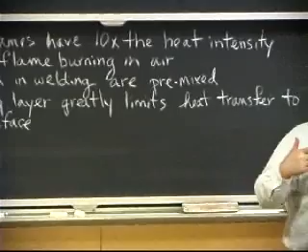We talked last time about flames, and we mentioned that pure oxygen flames have 10 times the heat intensity of the same flame burning in air. That's because the combustion intensity is the product of the enthalpy of the reaction, basically the temperature of the flame, and the velocity of the flame, the rate at which it brings heat to the surface. That basically makes the heat and combustion intensity proportional to the temperature of the flame squared.

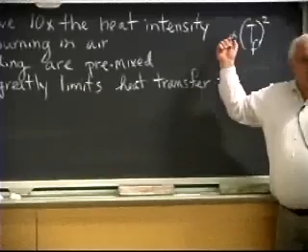Or thereabouts. So basically, a flame burning in air may have a temperature of 1,000 degrees C, or 1,800 degrees F, or even 2,200 degrees F. It's all approximate in all this stuff. But nonetheless, by all that extra nitrogen, you reduce the heat intensity significantly.

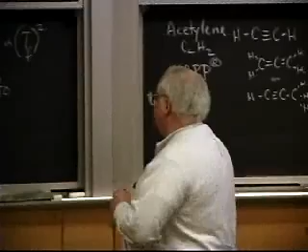Most of the flames we use in welding are pre-mixed. If we look at the torches, whether it's the little propane torches I passed around the other day, where you basically just have some holes in a venturi, and the tube itself is the mixing chamber, or whether it's an oxy-acetylene torch where you turn on a fuel valve and an oxygen valve, and then you have a mixing chamber, and then you go through the tube - doesn't really matter. They pre-mix and get something close to the right stoichiometry.

And in fact, in an oxy-acetylene torch, you shouldn't play too much with the acetylene pressure. The acetylene pressure should be roughly constant at about, if I remember correctly, about 5 psi.

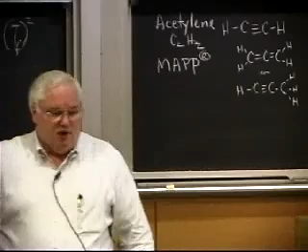And you should - anybody know how much you open a fuel gas valve? If I'm turning on the gas in a tank, or even on the torch, do you screw the valve all the way open, or do you just open it a half a turn, or 10 turns, or 5 turns? A quarter turn to a half a turn. And the reason is you want to be able to shut it off quickly. You don't want to have to sit there and crank the thing 10 turns while something else is burning up. So that's the general rule on fuel gas cylinders or torches: the fuel gas only gets opened a quarter to a half turn, and that usually will allow enough to flow through.

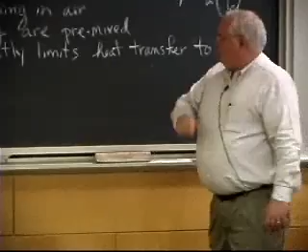An argon tank or an oxygen tank - actually oxygen tanks are probably the same kind of partial turn. Argon tanks, on the other hand, you're supposed to open them all the way, which might be 6 or 7 turns. The reason is they have a seal to close. They also have a seal at the top of the valve so that you don't leak oxygen impurity or air impurity into the top of the valve when the valve is open. So basically they have a seal at the top, and you're supposed to open it all the way to seal the top so that something doesn't leak into the valve while the gas is going out, because you're trying to get good pure argon as opposed to something contaminated with air.

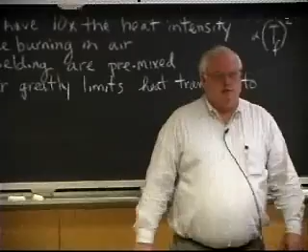The other thing - anybody else? What about the threads on fuel gas? Anybody know what they do for safety on the left-hand threads? In that way, it's impossible to hook the oxygen and the fuel up to the same system, because you can't screw things together. You can't screw right-hand threads and left-hand thread systems together, because what would happen if you did? You'd end up with a little bomb somewhere, right? And people have done that in the past, which is why the standard is the left-hand thread.

And you know how you can tell - well, in most cases, the left-hand thread you can tell, because on the hexagonal nut, they basically machine a little groove in there to remind you that it's a left-hand thread. I guess I should have brought one, but if you look at an oxy-acetylene torch setup, it'll be a left-hand thread, but the nuts will also have a little groove machined through the middle of the hex, so that it can hopefully remind you why it's not screwing on properly when you turn it with the right-hand thread.

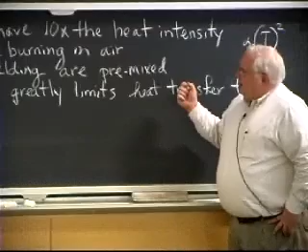The last thing we said was that the gas boundary layer greatly limits the heat transfer to the surface. I can be bringing in the equivalent of 100,000 watts per square centimeter to the surface, but the actual amount that gets into the material is only 2 to 10% of that, depending on the velocity and temperature of the gas. The reason is I get this stagnant gas boundary layer, and I have to conduct the heat through that stagnant layer. It's basically an insulating layer on the surface of the solid or liquid I'm trying to heat.

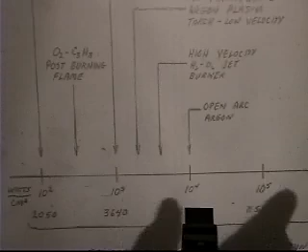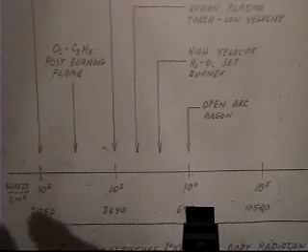We talked about flames in general only having heat intensities down in the 10 to the third watts per square centimeter range. Here's that plot again. The oxy-acetylene flames are down here, but we're going to talk later about how we get to arcs, which are essentially a type of flame that gets an extra order of magnitude for an open argon arc, essentially a trick to get around the boundary layer problem. Today we're also going to talk about flame cutting, where I actually get around the boundary layer problem and can get heat intensity equivalent to about 100,000 watts per square centimeter. So there are ways around these limitations on flames, and we'll talk about those shortly.

There's also a debate among people who sell gases about whether you should use acetylene or MAPP for welding of steel, or which one you should use for cutting. Remember, acetylene is just two triple-bonded carbons with two hydrogens. It's as simple a hydrocarbon as you can get, the smallest number of atoms possible in a hydrocarbon. Even methane has 5 atoms, CH4.

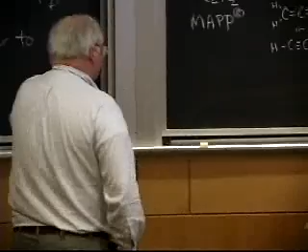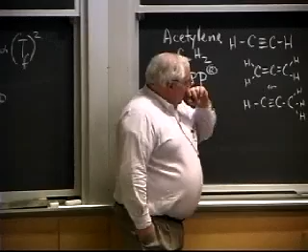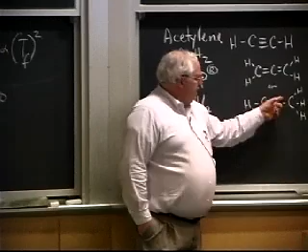The adiabatic flame temperature, if you burn acetylene in pure oxygen with exactly the right stoichiometry and no heat loss to the surroundings, is 3,100 degrees C. MAPP, on the other hand, a registered trademark, stands for methyl acetylene propadiene. Propadiene is 3 carbons with double bonds between them, filled in with 4 hydrogens, so it's C3H4 - that's all review. Methyl acetylene has a methyl group, CH3, attached to a triple-bonded carbon - that's your acetylene with a methyl group on the end.

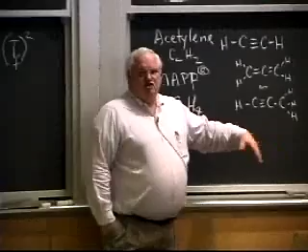It turns out MAPP gas, because it has more hydrogens, and hydrogen doesn't burn as hot as carbon, has a slightly lower adiabatic flame temperature of about 2,870 degrees centigrade, roughly 230 degrees lower. Now, if you listen to a MAPP gas salesman, he'll tell you MAPP is safe - it can be pressurized, you don't have to fill the tanks with acetone to dissolve it, and it's lighter and easier to transport. It's safer, and it works just as well.

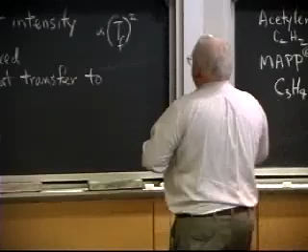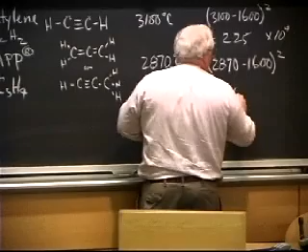And the question is, does it work just as well? It turns out the heat intensity of the flame goes as the temperature squared, and if I'm trying to melt steel, the temperature difference I care about is relative to the melting point of the weld pool, about 1,600 degrees centigrade. 3,100 minus 1,600, squared, gives 225 times 10 to the 4th. 2,870 minus 1,600, squared, gives 161 times 10 to the 4th. So even though there's only about an 8% difference in the adiabatic flame temperatures in degrees centigrade - maybe 7% in Kelvin -

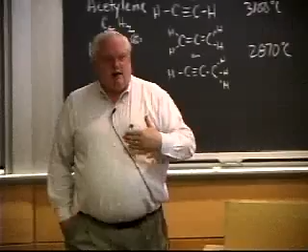it turns out there's a 40% improvement, or 28% decrease if you will, in the heating value of acetylene versus MAPP when trying to melt steel. If you're just heating up cold steel, there's hardly any difference at all, since it's 3,100 minus about 20 degrees C versus 2,870 minus 20 degrees C, and squaring those doesn't show much difference. But when you're heating something already hot, like a liquid weld pool, your ability to transfer more heat is limited by the upper temperature of the gas, so that small temperature difference has a big effect on welding ability. With oxyacetylene, you can probably weld about 30% faster in terms of travel speed along the weld pool compared to MAPP gas. So why does anybody use MAPP? Aside from being able to buy these nice handy cylinders, you can burn down your house more easily with acetylene.

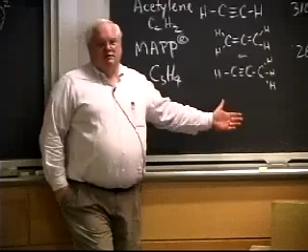Cheaper? No, it's actually not cheaper. It's competitively priced. The main reason is it's safer. It really is safer.

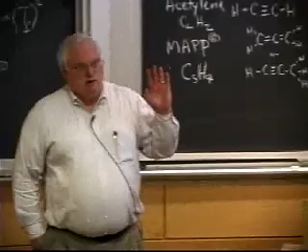For other applications, like flame cutting, it turns out you don't need that extra difference in temperature, it's not going to have a big effect. So let's talk a little bit about flame cutting, which is the next topic: oxy-acetylene cutting.

In an oxy-acetylene cutting process, how many people had actually seen it before the demo? Okay, so a lot of you have seen it. What's the biggest thing anyone's ever seen? Anybody seen 10-inch thick flame cut pieces? 3-inch? 4-inch? 1-inch? Okay, 1 or 2 inch. Well, the biggest I've ever seen is about 10 feet thick.

Steel? Yeah, we're going to talk about it. It turns out steel is not the only thing that can be flame cut, but it's one of the only things that can be flame cut. Flame cutting is sometimes called burning of the steel, and it literally is oxidation of the iron. The heat is coming from pure oxygen hitting the hot iron surface.

We'll talk about how you get around the boundary layer problem. You get tremendous heat intensities, and as long as you can blow a jet of oxygen into the hole, you can cut things that are very thick.

Some of you have seen, if you're here for the second half, a continuous cast in a steel mill, where you have a hot band of steel coming out of the casting furnace, and they basically just take a pure oxygen lance. They don't even have a flame around it, they just hit it with pure oxygen and cut through it. So you can certainly cut through 10 inches, they do that regularly on a continuous casting line for steel plate.

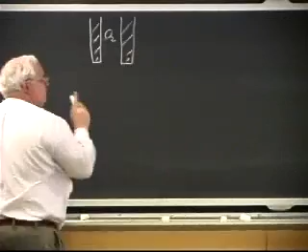So what you typically do, the torch for oxyacetylene, schematically, is very simple. I'm going to have a central jet that will contain pure oxygen, and I'm going to have some outside jets which will be an oxygen-fuel mixture, pre-mixed.

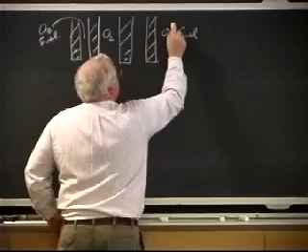So initially, this is my steel plate, and I will start some little flames, pre-mixed flames, shooting out here. I don't want to turn my oxygen on yet.

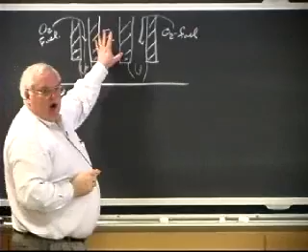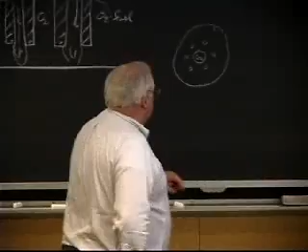If I look down, end-on, at the tip, here's my central oxygen hole, and I'll have a series—it can be 4, it can be 6—depending on the size of these things. Obviously if I'm cutting something 6 inches thick, I have a bigger torch and a much bigger oxygen center jet, so I'll have more circles of these little pilot flames around here.

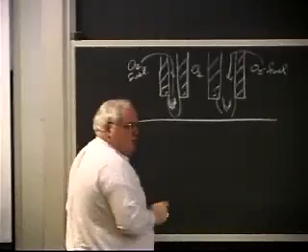The pilot flames, if it's oxyacetylene or oxy-MAPP gas, don't have to be—you can also use oxy-propane, or oxy-gasoline. People use gasoline sometimes because it's a nice, simple liquid; you don't have to pressurize things.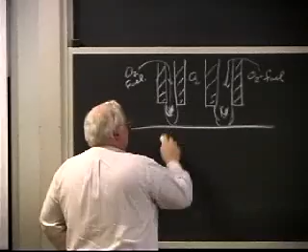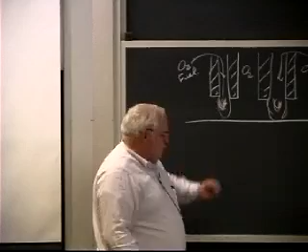Basically, the flames might be a quarter inch long, and it'll be kind of a soft blue here, with a deeper blue, or actually kind of a white, internal cone. This is the primary combustion cone, and this is the secondary.

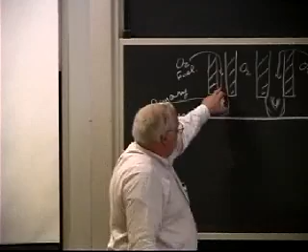In the primary combustion zone, you're burning your fuel, C2H2 or C3H4 or whatever your hydrocarbon is, and getting primarily water vapor and carbon monoxide. In the secondary combustion zone, a little bit of air comes in and the CO is burned to CO2. Carbon monoxide forms at high temperatures, CO2 forms at lower temperatures.

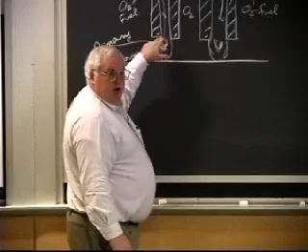So you have a hotter internal cone and a cooler outer cone. The primary combustion is of what's coming in your premixed flame, and once you use up all your oxygen, the outer cone is the secondary combustion. It's basically a diffuse flame, but very controlled diffusion, so we don't call it a diffuse flame - it's not wisping around, it has high velocity like the center. So that's what the torch looks like.

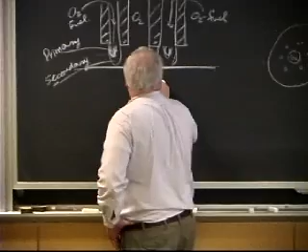This is the surface of your steel, or titanium, or whatever it is you're going to cut. Typically when doing oxy-acetylene cutting, I come down and put this inner primary flame right on the surface, just little points right on the steel. Then you watch the surface of the steel until it starts to glow a little bit red. You're holding one spot, you see it glow red, and then I look for a little specular reflection, something kind of blowing back at me a little bit.

That basically is the oxide surface of the steel - an oxidized surface, with the oxide starting to break up. It turns out for steel, the melting temperature is 1380 of the oxide.

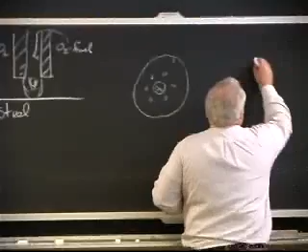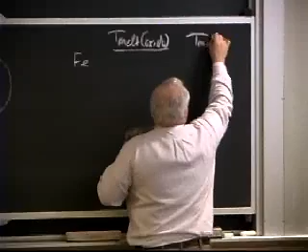So it turns out for iron, comparing the melting temperature of the oxide versus the melting temperature of the metal: for iron, it's 1380 degrees centigrade and 1536 centigrade. So the iron oxide surface layer on the steel melts at a lower temperature.

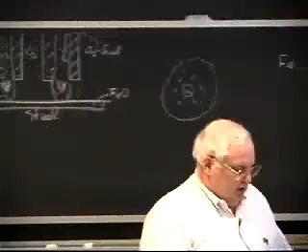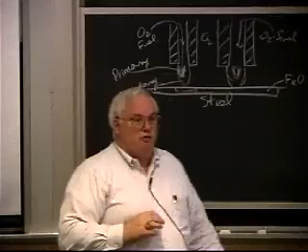It turns out the oxide is FeO - this is the black oxide on the surface, same stuff as before. But as you heat it up, the oxide will expand on the surface and eventually start to crack up a little bit, which is giving me some of that specular reflection. As soon as I see that, I open up the trigger on the torch, and oxygen blows through. Now through these little cracks in the oxide, I'm putting pure oxygen in contact with hot iron as it breaks through the iron oxide.

I'm breaking up these little islands of iron oxide, and I have pure iron underneath at 1300 degrees centigrade. In the presence of pure oxygen, I get ignition. I burn the steel - the iron becomes the fuel for that central oxygen jet. At that point, I can turn off the preheating flames and keep burning with just a straight oxygen jet.

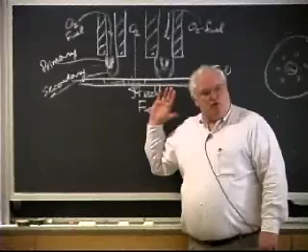Now, it turns out for hand torch cutting, you tend not to turn off those flames, because the rate at which you can move forward, if you're just straight oxygen cutting, is only proportional to the rate at which heat is transferred to the material ahead of you. So these are basically little preheating torches.

I ordinarily keep those on, but if my steel was already hot, like in a steel mill, I just cut with a straight oxygen torch - I don't have to do it, just the oxygen hitting the hot iron oxide.

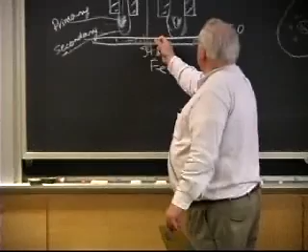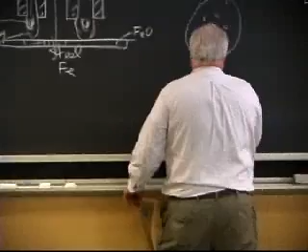And you really don't have to get to quite 1380 - it turns out this stuff breaks up. But once you do get ignition, it does get to 1380, just because of the heat of combustion of the reaction. You've got iron plus 1/2 O2 goes to FeO, plus lots of heat, and that heat melts the FeO.

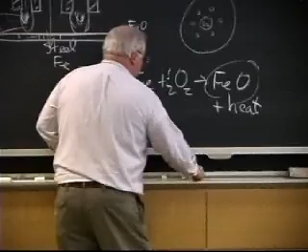The gas jet blows the liquid oxide aside, exposing more fresh iron to a fresh oxygen jet, and you just burn right through it. As you probably saw, you can punch through one inch of steel in a fraction of a second with this. It's a very rapid process - basically a flare going off, but a controlled flare.

So if I want to see what a flame-cut surface looks like - turns out these are all plasma cut.

This is a handy dandy plastic standard from the American Welding Society for surface roughness guide for oxygen cutting. There's sample 1, 2, 3, and 4. Sample 1 is like someone who either has Parkinson's disease or was drinking too much the night before. Sample number 4 is a fairly flat, relatively smooth surface.

I've seen things better than this, but basically the American Welding Society sells this so a welding inspector can go through the shop, and if they've called out a specific level of quality of the cut, it's just a comparative gauge. But for you, it's just a little plastic mold. I'm sure those plastic molds were made from real pieces of steel, so far as that goes.

Now, it turns out there are other metals that you can flame cut. Well, actually, there are not. But you can flame cut iron, and that's good.

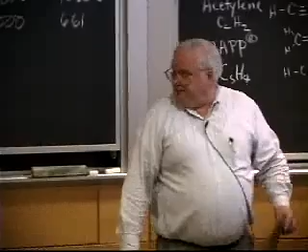Aluminum, it turns out, we have some problems. The melting temperature of aluminum oxide is 2000 centigrade, and the melting temperature of the aluminum is 661. You cannot flame cut aluminum. What will happen is you'll melt the aluminum underneath before the oxide breaks up and exposes fresh aluminum. That's not to say aluminum metal can't be ignited, but it won't be ignited in a nice controlled way with the torch. You'll have a very serious fire as far as that goes.

So that doesn't work. Magnesium is about 2800 C and 660 or 650 melting point of magnesium. So that can't be cut.

Chromium turns out is about 20... actually it says 2800. I don't think that's right. I think it's 2200 and some.

What's sublimation versus melting? Go directly from solid to vapor, no liquid in between. Dry ice sublimes - solid to vapor, no liquid unless you're under high pressure. Chromium, as you heat it up, the solid just starts to vaporize away. You don't get chromium liquid unless you go to high pressures.

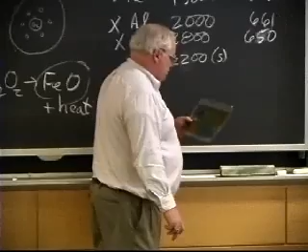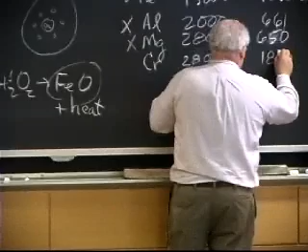Turns out, oh, I'm sorry, that was right - there's 2800 for the chromium metal, I'm sorry. Or chromium oxide. It's 1815 for the metal sublimes.

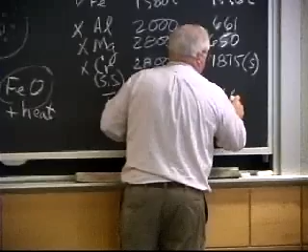And so that means stainless steel cannot be flame cut because it has a chrome oxide layer on the surface. So you've got to have something with a lower melting oxide. Except titanium - 1750 for the oxide, 1668 for the metal. Turns out titanium can be flame cut.

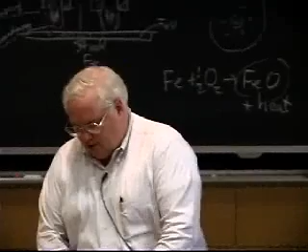The reason it can be flame cut is that above 900 degrees centigrade, titanium diffuses away the protective titanium dioxide scale. The oxide scale will essentially dissolve away, or the oxygen will dissolve into the titanium. So it is possible to flame cut titanium.

If you'd like to see a piece of flame cut titanium, this is the only one I could find in my office, but you can look through your office to see if you have one. This is actually a historic piece for me - this was my first research contract when I became an assistant professor 25 years ago. There's a polished edge, two saw cut edges, but on the back side you'll see a darker edge with the same type of surface roughness. That's a flame cut titanium edge, on 1-inch thick plate. Flame cut's just fine.

The only problem is it tends to give off lots of smoke. And in fact, one of my stories I like to tell is...

This is before my office was right across from the lab. I was up on the fourth floor, and there was a particular staff member who will remain nameless, but used to complain about the smells coming out of the weld lab sometimes, because you're actually in there welding and doing things - any kind of metal shop where you've got flames and torches. We have exhaust fans, and you turn them on, and they just go right out the window.

In any case, this was 15, 20 years ago, and the technician at the time was named Bruce. Bruce was flame cutting some titanium for some work we were going to do, and does a lot - even though the ventilation was on, the whole place kind of gets a little hazy and stuff. So the person across the hall smelled it and called the safety office. They called me, and I said, 'Oh, okay' - this was weeks before when we were doing it some other time. I said, 'Oh, okay,' and I just kind of ignored them. So they called the safety office.

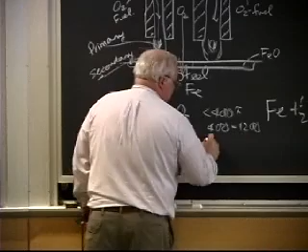Turns out Fe2O3 hydrates to form an iron hydrate. That's rust. Orange, brown, nice fresh rust is orange. As it ages, it hydrates slightly differently, turns brown. Fe3O4 is magnetite. It's magnetic, responds to a magnet.

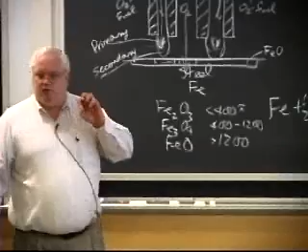It's sort of black. This could be magnetite on the surface of this piece, but I'm not positive. FeO is a slightly darker black. The black iron pipe that plumbers use to plumb boilers and things like that, that's FeO. That's what's called mill scale, because it formed at high enough temperatures that you're getting FeO. It's a very adherent layer.

And in fact, you can ask the question, why can I use black iron pipe in a boiler? If I go down in my basement and look at the hot water heater, the hot water boiler, it's just black iron pipe, steel pipe with FeO on it. If I look at my potable water system, the stuff I drink and wash with, it's copper. Well, why do I spend the money for copper if I could use black iron pipe? What's the difference between the two systems?

Not temperature, yeah, it's hotter, we make it worse in the boiler, right? You still get a lot of corrosion in the boiler system, though. Well, you can - the water in your boilers is like sludge after a while. So if you're not controlling things properly, that's true.

Which is 95% of the homeowners. Well, I've seen homes that have the same black iron pipes for 50 years. Oh, sure, the pipes will stay there, but the water in it gets rusty looking. Yeah, it tends to be rusty. It's the oxygen in the water. But if you go cut those pipes open, you're not going to see too much corrosion.

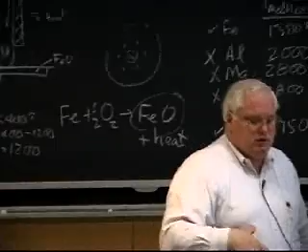Because of the loss, I had air in the system, and we were hearing gurgling up on the second floor. You could hear gurgling from the third floor in my daughter's bedroom, making noise for a couple weeks ahead of time. Finally, when I realized this guy had turned off the makeup water, I turned it back on, and the gurgling on the third floor went away because I didn't have any more air in my pipes.

But the problem is, if there's oxygen in the system, you get corrosion. It's not the water that forms the iron oxide - it's not a reaction of iron plus H2O going to iron oxide plus hydrogen. It's that the water promotes a galvanic reaction that allows the oxygen in the water to react with the iron and cause pitting and other damage. Get the oxygen out of the system, and you get no corrosion.

That's why in commercial boiler water systems, which really can't afford to corrode, they put deoxidants in there - things like nitrites. A nitrite is NO2, which will oxidize to NO3, so it scavenges oxygen from the system and prevents corrosion.

You also put in hydrazine, which is N2H4. Hydrazine will scavenge the oxygen - it's not that stable, it will form water plus nitrogen. So in nuclear reactor water, you basically put hydrazine in when you cool down the reactor and shut it down for a while, to keep any oxygen from getting in the water.

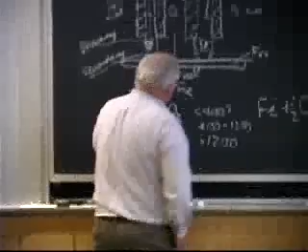What happens when I seal off that closed water boiler system - yeah, there's oxygen there, but I consume it very quickly by forming a little bit of mill scale. In fact, it's a low pressure oxygen system, and I'll form this not just at high temperatures, but at lower oxygen pressures than atmospheric - I'll form FeO rather than Fe2O3.

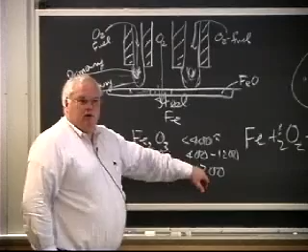Obviously this has got more oxygen - these two have more oxygens than this. This is going to be favored as the formation at lower oxygen pressures and higher temperatures. So what happens is I scavenge the oxygen by doing a little bit of corrosion in my system.

Then the oxygen's gone, and as long as I don't let it back in. Now, about 4 or 5 years ago, someone sent me a 1-inch pipe that had complete hardening of the arteries, completely clogged with rust.

This was from a wet fire water system, which is supposed to be a closed system. There are dry systems and wet systems. The advantage of the dry system is there's no corrosion in the dry pipes, but the disadvantage is if the valves don't open, you don't have any water. The wet system always has water, but the disadvantage is if you don't maintain it properly, you can get corrosion. It's supposed to be a closed water system.

Well, they brought me this thing, and it was only a 7-year-old system. I had it next to my desk for about 1.5 years before I threw it out. It was about a 1-inch length of pipe, completely filled with rust. I called them up and said, you guys got a leak in your system somewhere. He said, well, yeah, how'd you know that? I said, because you have to get oxygen in the system to cause this kind of corrosion.

He said, oh yeah, we had this big warehouse, and we had about a 3/4 inch or 3/8 inch leak that we just let go down the drain for the last few years. So they knew they had a leak in the system and they had makeup water coming back in. They asked, well, what do we do? I said, you replace the entire system, because you didn't fix the leak for 3 years, so now you get to replace the entire system.

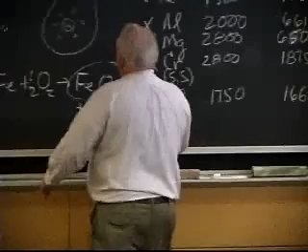See, I told you I can go with one digression. I'd much rather do digressions than this other stuff. Anyway, you'll remember the stories - just lecturing is dull.

Do I have any other stories on water systems? I do have some. Turns out if you have soft water, which we have in New England - I told you about marbleizing pipes before, didn't I? In a potable water system with copper pipes, you want a little excess calcium so the limestone precipitates out and you get these marble deposits. It turns out limestone is calcium carbonate, and marble is calcium carbonate too, just formed a slightly different way geologically. They call it marbling of the pipes.

If you have a slight excess of calcium in your water - calcium being hard water - you'll plate out this white deposit on the inside of your pipes. Sometimes it's so thin you can't even see it. If you cut out a piece of pipe from your basement in an old house around here, slit it in two, and look at it, it'll just look kind of brownish copper. That's because the marbleized layer is so thin you can't see it.

But if you put it in the scanning electron microscope and analyze that surface, you'll see all kinds of calcium and copper. The copper peak might be 5 times the size of the calcium peak, but you'll see a significant calcium peak. The reason being, you basically had limestone or marble precipitate out, if you're lucky.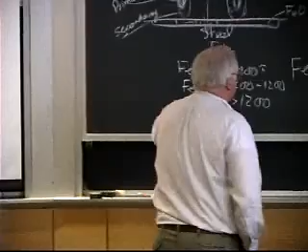Now it turns out the reason you can get such high rates of effective heat transfer here is because I have no gas boundary layer, in theory. What happens to the gas? Well, the gas in here is pure oxygen, and it goes from a solid to a gas to a liquid. So I condense my boundary layer to a liquid.

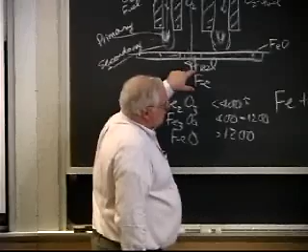The boundary layer is consumed by the reaction and forms a liquid, which is blown away by the jet of oxygen coming in. So in theory, since this is the only thing, I have no gas boundary layer, and now I can get the whole combustion heat intensity, essentially, of the flame. In this case the flame is an oxygen-iron flame, but the combustion heat intensity is the rate at which I blow that oxygen to the surface.

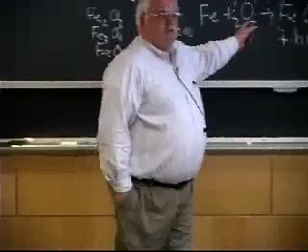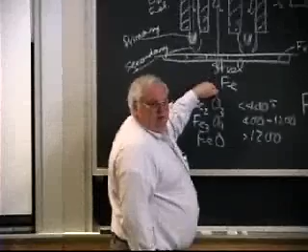If I calculate a combustion intensity, it's the enthalpy of this reaction times the velocity at which the oxygen is coming to the surface, and I don't have to degrade it by 90 to 98% because of a boundary layer. I actually have the full heat intensity on the surface. So I go from 1,000 watts per square centimeter to close to 100,000 watts per square centimeter as an effective heat intensity. If I look at my heat affected zone sizes and travel speeds, the effective heat intensity is several times 10 to the fourth, approaching 10 to the fifth watts per square centimeter as an effective surface heat intensity. But it's not really a surface heat intensity because I'm really blowing my fuel down beneath the surface. Nonetheless, it's a very, very high heat flux.

The problem is it's actually limited by some other things. Steel is not just iron, and I don't have just iron and oxygen. There's a paper called the iron-oxygen combustion process, which is about oxy-acetylene cutting. It's a nice paper from about 1955, September '55. Probably the best paper written on the subject, even today.

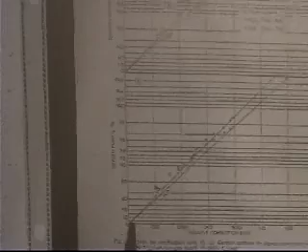In any case, what he did is he has the equivalent concentration. This is the oxygen purity plot, and this is the equivalent oxygen purity. If you start measuring relative combustion rate, how fast could he flame cut? This is a guy, Alan Wells, who used to be head of the British Welding Institute, but since retired. After all, he wrote this in '55.

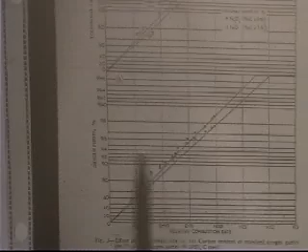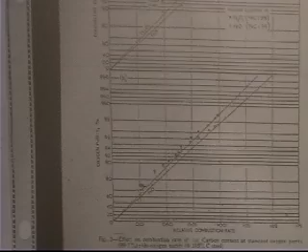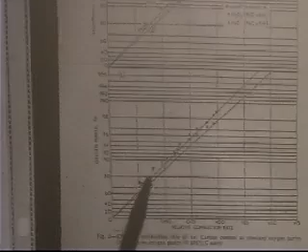Where's his oxygen purity? Standard oxygen purity was 99.7%. He's got Fe2O3 or FeO as the oxide that forms, and he finds the oxygen purity going from 98, 97, 99% down to 80% or 60%. You find your ability to burn, the speed at which you can burn, goes down as your oxygen purity goes down, because now I have excess nitrogen around. I've now replaced something that forms a boundary layer. It's a thinner boundary layer because it's only a partial boundary layer. I have less nitrogen than if it was air.

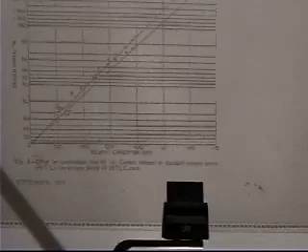But even a 5% impurity gas, inert gas in my system—if I go from 99% down to 96%, I'll get about a 1/3 drop in my speed that I can cut with. So you have to use high purity oxygen.

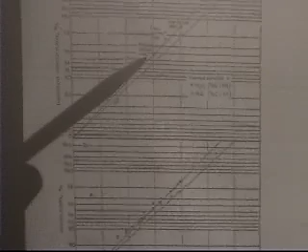Up here, he was basically looking at the fact that if I look at the carbon content, that's what he means by equivalent oxygen purity. If I have Swedish iron or Armco iron, which has almost no carbon, or low carbon steel, and I go down here to razor steel, which is over 1% carbon, here the effective impurity is the carbon in the steel.

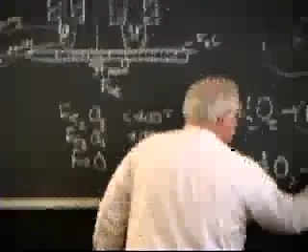Carbon plus 1/2 oxygen goes to carbon monoxide, which is a gas. The carbon monoxide forms a boundary layer because it's not consumed as readily. So down here, it's nitrogen impurity in the air that's dropping my cutting speed. Here, it's carbon monoxide formation because I'm burning the steel. High carbon steels will cut slower than low carbon steels. There is a difference, and it's basically controlled by the boundary layer.

So that's what happens with cutting. I didn't say anything else about cutting. Anybody have any questions on cutting?

It turns out it's an amazing process to me. The width of your cut and the thickness of the gap you're going to get is just strictly determined by the fineness of your oxygen jet. The width of this thing—when you're cutting something that's 6 inches thick, you're going to have a 1/2 inch wide or 3/8 inch wide kerf. If I'm cutting something very thin, I can make that down to 1/8 of an inch. I can't get much smaller than that. If I'm doing something that's 6 feet thick, I may have a kerf that's 1.5 inches wide, obviously. But try to cut through 6 feet of steel any other way.

Although, we don't have time—I'll tell the next class. On Monday, remind me to tell you about how you cut aluminum, if you have thick aluminum. But that's enough for today.